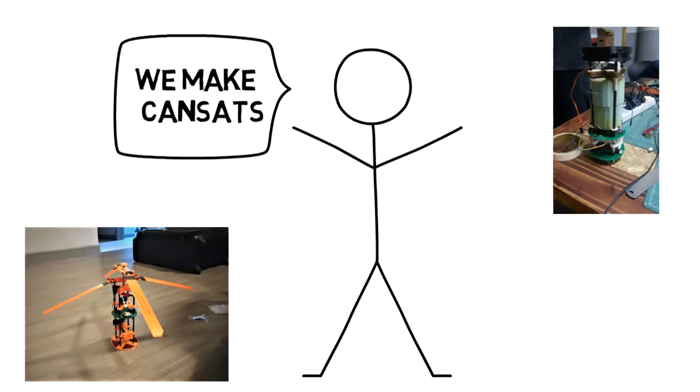Hello there. I know we are meeting for the first time. Actually, it is our first time here at the Spaceport America Cup. My friends and I, we are major aerospace enthusiasts and we make CANSATs, quite a lot of them. We thought, why not rockets as well? And then we discovered the Spaceport America Cup. We are very excited to be a part of it and looking forward to a good competition this year.

Hello, we are Team Samarth from VIT Vellore, India. I'm Pranchu Grawal, the Vice Captain and Aerodynamics Head of the team. We are competing in the 10,000 feet COTS Solid Rocket Propulsion System category with our launch vehicle Agastya. Its name is derived from the epic of Ramayana. The name of our payload is Pimac. Our team is divided into three major departments, namely Mechanical, Avionics, and Management. Mechanical department is further broken into three sub-departments, namely Aerodynamics, Structures, and Propulsion. Each department and sub-department have their own leads and members.

This is our maiden attempt at the competition and our team has worked incredibly hard despite the pandemic. Now, let's get started with the technical portion of the presentation.

Hello everyone, I'm Lakshman and I'm the head of propulsion at Team Samarth. Now let's look at the propulsion subsystem. What started as a bunch of people making rocket candy motors for fun without knowing how or why they worked the way they did has evolved into the department of propulsion. With little to no specialized resources due to the novelty of a student rocket team in the university, we had a challenging task at hand.

In this past year, we haven't just learned, we have also come up with our very own interpretations of better rocket propulsion systems. Since this is our first year at the tournament, we have opted for a COTS solid rocket motor to gain experience and come back in subsequent years with ever more interesting ideas.

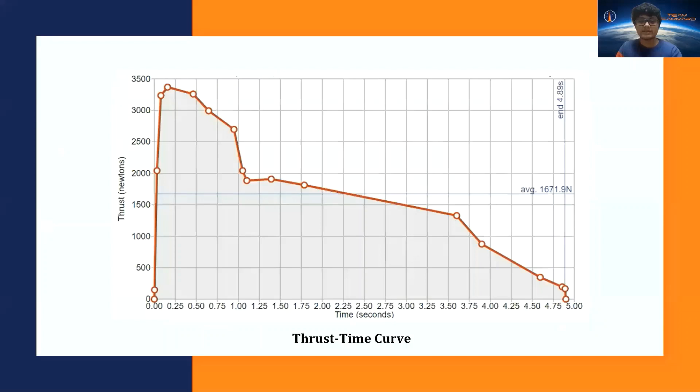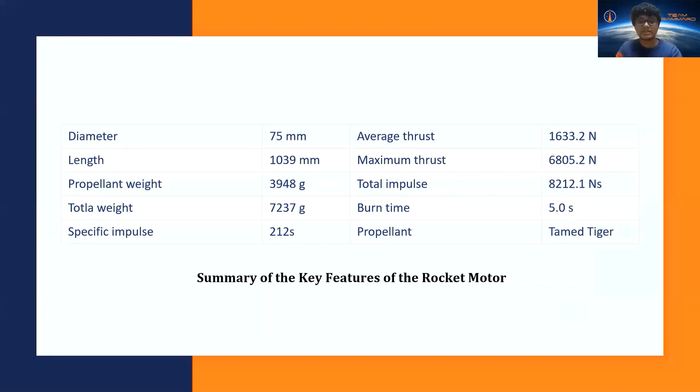The vehicle's propulsion system is an M-class P-type solid rocket motor manufactured by AMW. A high thrust motor is chosen to achieve a straight and stable flight with a target altitude of 10,000 feet. Furthermore, an initial thrust of about 3,000 newtons ensures a high launch rail exit velocity. The total impulse of the motor is about 8,200 newton seconds, which is found to be acceptable as per the guidelines.

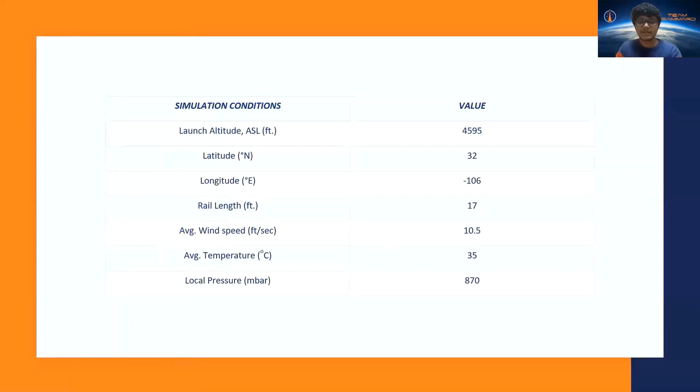The flight mechanics subsystems conducted flight path simulations of the rocket during different design stages, verifying that an apogee of 10,000 feet is achieved safely. Simulations were conducted using probable launch conditions obtained using historic weather data. Worst case scenarios were assumed wherever relevant.

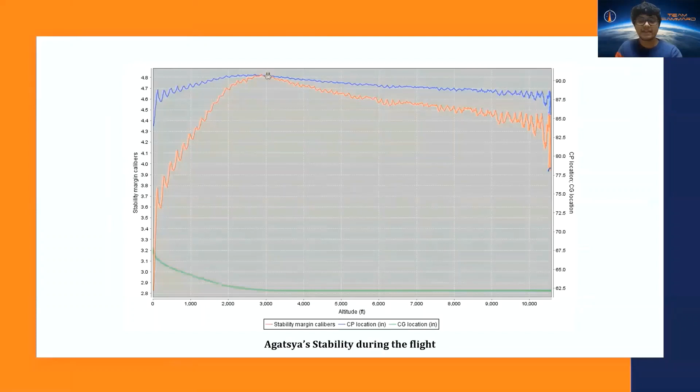The team used OpenRocket as the primary simulation software to precisely predict the flight profile and provide us with detailed flight data. Results show Agastya was able to attain an altitude of 10,000 feet successfully and also fulfill the competition's stability criteria for the flight.

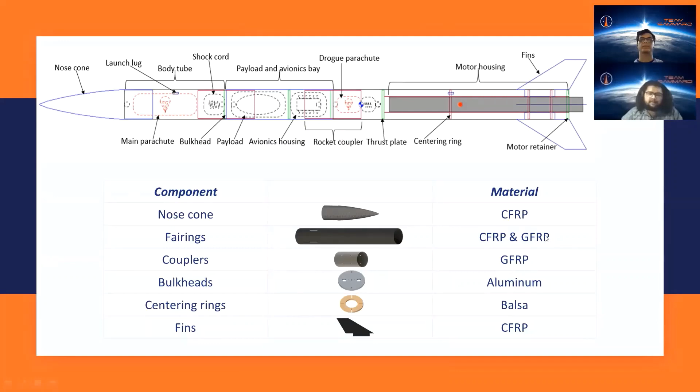Presenting Agastya's aerostructures, my name is Harsh Desai. And I'm Sankar Dua. We are from the mechanical department, and we'll be taking you across the design and manufacturing that went behind Agastya's aerostructures. This is Agastya's sectional view displaying the complex internal subsystems. The rocket is made up of carbon fiber, glass fiber, balsa, aluminium, as well as 3D printed material.

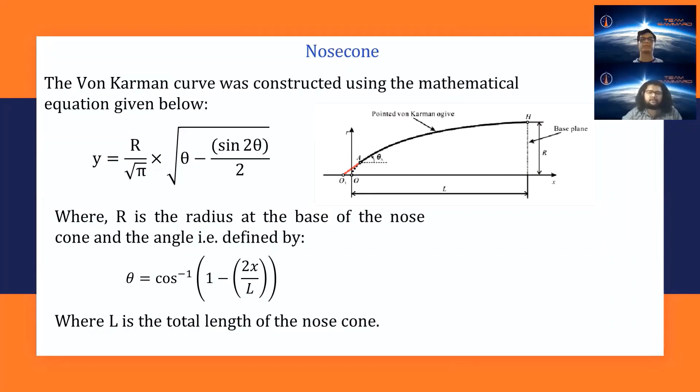Now coming on to the nose cone. The nose cone for Agastya was developed using a Von Karman profile with a fineness ratio of 3, as it provided the least drag characteristics and attained maximum apogee amongst other profiles. Different nose cone geometries were analyzed using OpenRocket and then further studied by conducting a CFD simulation on ANSYS Fluent.

Now, the manufacturing of the nose cone was done in carbon fiber fabric with epoxy as the matrix by wet layup process. Since we haven't had enough practical experience with composite manufacturing, we decided to go with the most suitable option we studied about in our college courses, which was wet layup. Filament winding was ruled out due to the unavailability of technology.

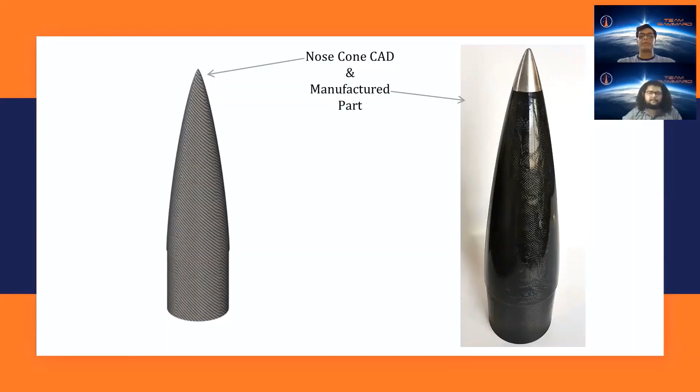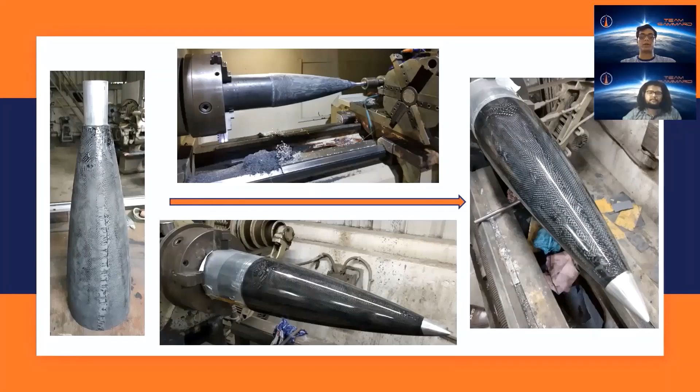Now, coming back to the wet layup method, we needed a mold that could act as a die for the layup process. So to avoid the costs involved in making the aluminium die, we used an ingenious 3D printed mold using ABS material. The first ABS mold was given a 5 mm thickness, but the curing process in wet layup is highly exothermic, and this caused the first ABS mold to deform. So we then printed a 10 mm thick mold so that the ABS material could withstand the thermal stresses involved and could give us the exact profile for the nose cone.

Now coming on to the body of the rocket, it is made up of 2 carbon fiber tubes and a glass fiber tube, all joined by couplers. The 3 sections of the rocket would be recovery, avionics, and propulsion from top to bottom.

The tube joining the nose cone is the upper fairing. This contains the main parachute of the rocket and was manufactured in carbon fiber.

The second tube consists of the avionics bay and payload. This section is responsible for the transmission of telemetry, and to facilitate that, the second tube was manufactured in glass fiber.

The last section, which is the motor bay, consists of the parachute, the motor of the rocket, and contains slots for the addition of fins. Being the longest body tube and consisting of the motor of the rocket, it has to be structurally sound to withstand the stresses involved, and hence it was manufactured in carbon fiber.

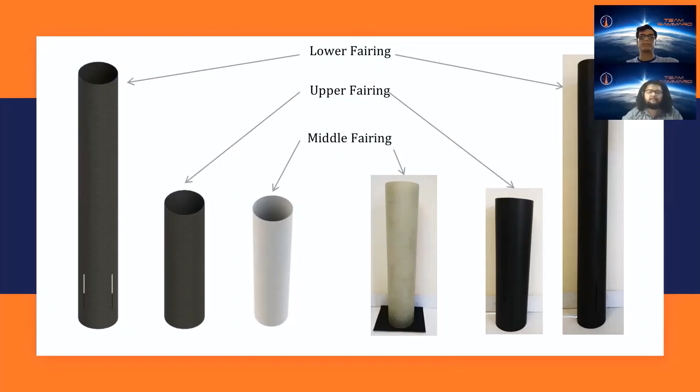Now, the couplers to join these tubes were made out of glass fiber, and the length was chosen to be double the radius of the fairing to avoid buckling. While manufacturing the couplers, we learned that the given tolerances weren't enough, and hence it had to be sanded down later.

All these components comprising the rocket body, namely the tubes and couplers, were manufactured on aluminium mandrels using wet layup due to its simplicity and cost effectiveness.

Now, to help transfer the major loads on the airframe, namely engine thrust and recovery deployment, Agatsya consists of bulkheads. Now, these bulkheads should have a high strength to weight ratio and mustn't be affected by these thermal stresses involved. The bulkheads used are 0.6 inches in thickness and made up of aluminium.

Threaded rods are connected through each of the bulkheads along with the avionics and payload to help with the structure to withstand the ejection load.

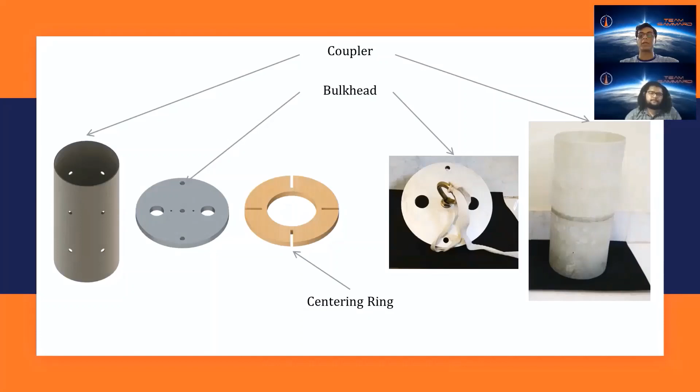Now, coming on to the fins, to determine the design of the fin module, emphasis was made on two primary design parameters: first, an efficient planform geometry, and second, a uniform cross-sectional profile. The fin design was optimized to provide stability throughout the flight, making the rocket reach maximum apogee.

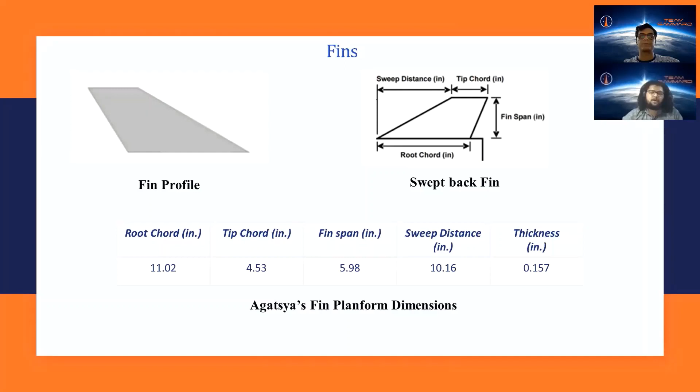The first step was to study different technical reports published by the winning teams to have a broader perspective towards choosing the best possible design. Open Rocket was used to analyze and compare different design configurations.

So the current rocket is equipped with 4 fins equally spaced around the airframe, which are mounted onto the lower fairing, along the motor tube and through slits in the airframe.

A high stiffness fin is required to withstand the flutter that takes place at the velocities in which the rocket would travel. Carbon fiber was hence considered appropriate as it gives high tensile modulus and is lightweight.

So the method of manufacturing was wet layup followed by high force compression. The carbon fiber fabric was first laid up using epoxy as a matrix in a 4 mm thick plate, which was then compressed to a force of 10 metric tons for 8 hours to help the resin cure.

This plate was cut using a water jet cutter into the desired profile of the fin. So now these water cut fins were inserted into the slits of the body tube onto the centering ring and then bonded with epoxy. We added 2 more wet layers of carbon fiber along the contact edges to maintain structural integrity.

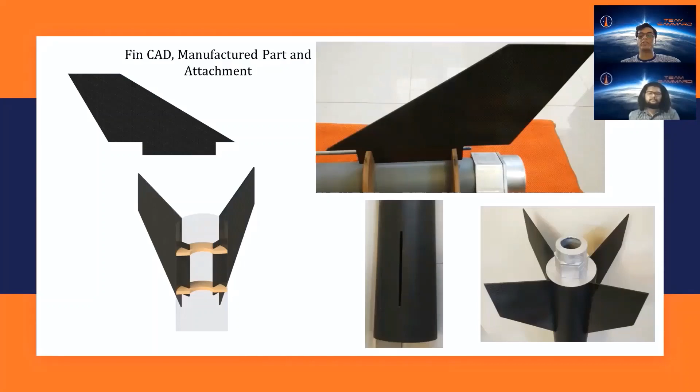So our payload is a pitch measurement and control unit, which we call PiMAC. A rocket is prone to disturbance and turbulence. The purpose of PiMAC is to measure the rocket's pitch using an inertial measurement unit as it ascends and make corrections to a custom gimbal that we've designed based on a predefined trajectory that we set.

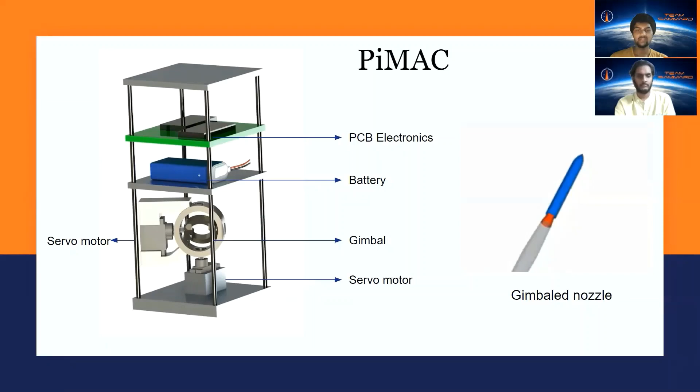The purpose of the gimbal is to demonstrate how the corrections would have been made if the rocket's nozzle would have been armed with this gimbal system. However, currently the gimbal is placed inside the payload structure and does not interfere with the actual rocket's flight.

The payload structure consists of an optimized dual-axis gimbal and the supporting electronics. The gimbal is controlled using 2 servo motors capable of 360-degree rotation, providing complete rotation across 2 axes. The supporting electronics includes a microcontroller, an IMU sensor, and a battery to power them up.

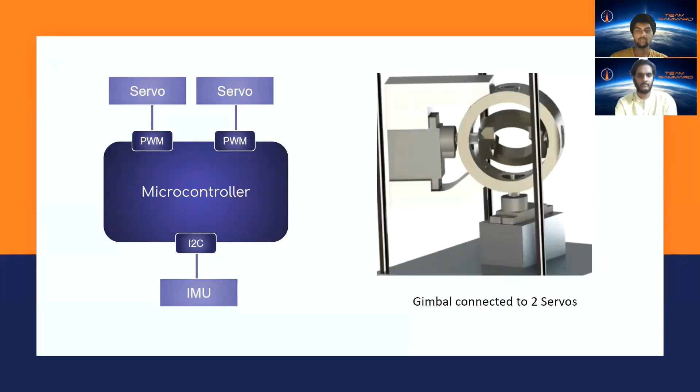The IMU sensor selected is BNO080, whose gyroscope provides pitch values of the rocket. A PID controller is designed which is being implemented using Raspberry Pi Pico. The block diagram in this slide shows the closed-loop control system that is being implemented.

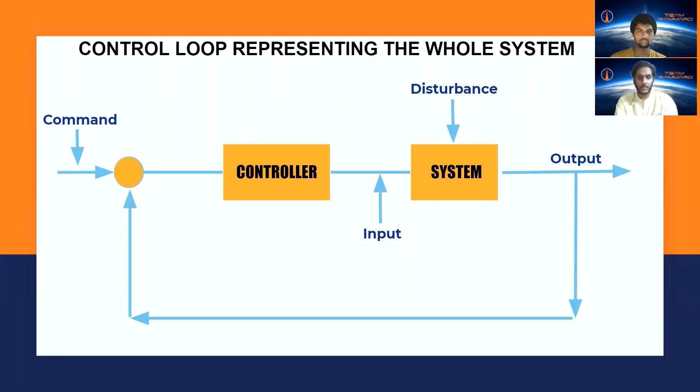The predefined pitch value is passed as command to the PID controller, which will control the actuators. The system's response to the controller output as measured from the IMU sensor is fed back to the controller, so that if any deviations are observed due to disturbances in flight, necessary corrections are then made.

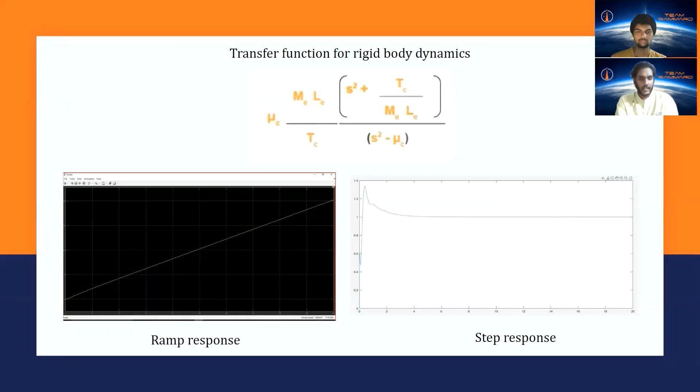The PID algorithm has been designed considering the rigid body dynamics of the rocket according to the transfer function given in the slide. A time slice approach has been used where the short period dynamics of the rocket is considered. The PID gain parameters were tuned based on step and ramp response of the system, and various simulation outputs were analyzed to get a stable system.

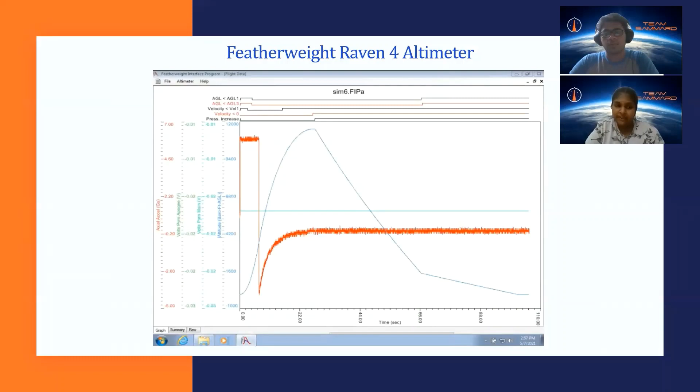The secondary system is programmed to deploy the drogue after a set delay of a few seconds after reaching apogee, and the main parachute after a set delay of a few seconds after reaching 1,500 feet.

A CO2-based ejection mechanism is used as a release mechanism for the parachute at the programmed altitudes. Both the primary and secondary altimeters control two igniters each through the pyro channels. Two 9-volt batteries are used to power up these altimeters.

The altimeters also serve the purpose of the altitude logger, which will measure the rocket altitude through barometric pressure and atmospheric temperature data and store it. The flight data can later be plotted and analyzed on the GUI.

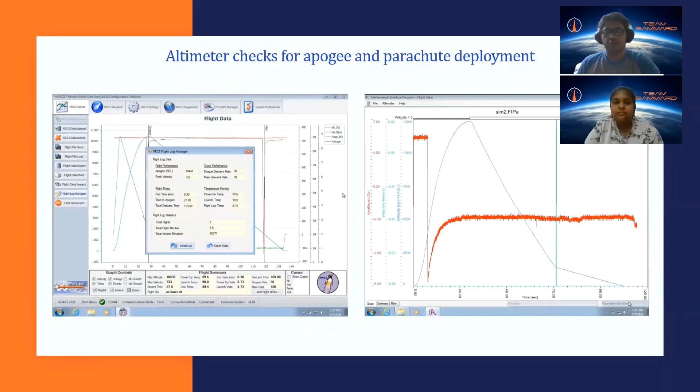The second recovery system consists of the Featherweight GPS tracker system, which is used to acquire the location of the rocket in terms of latitude, longitude, and altitude above the ground.

The ground station endpoint is handled by the user and is responsible for relaying the data to a mobile app. This will let us track the position of the rocket once it lands and retrieve it. A 3.7-volt lithium-ion battery is used to power up the GPS.

Now on to the drift distance estimation. For determining the drift distance, OpenRocket was used to simulate the worst-case scenario at the launch site, when the average wind speed could go up to 7.2 miles per hour with a turbulence intensity of about 10%.

The results showed that Agastya will have a maximum possible lateral distance of approximately 2,860 feet east of the launch, but only lands 1,296 feet from the launch site. This distance is well within the regular operational range of the launch control system, thus aiding a successful recovery of the rocket.

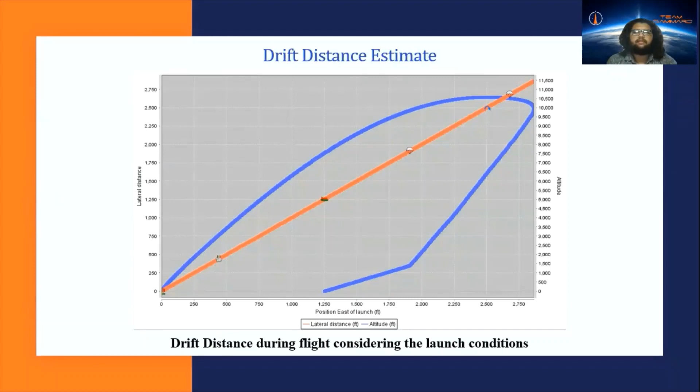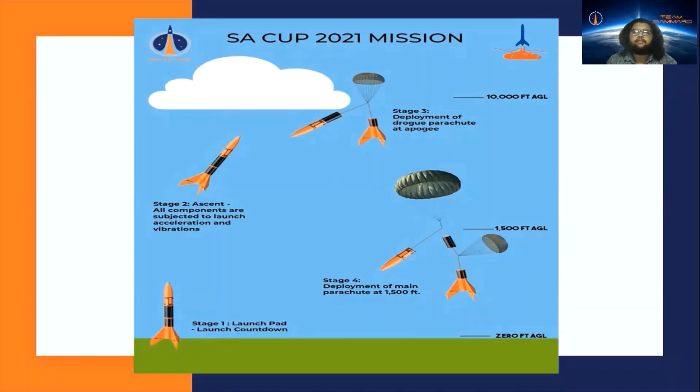Agastya employs a typical dual deployment recovery system. It will carry two parachutes, drogue and main. The drogue parachute will be deployed at apogee to initially reduce the rocket's descent velocity so as to accommodate the deployment of the main parachute at an altitude of around 1,500 feet.

Now on to the designing of the parachutes. Both parachutes are elliptical in shape that produces a coefficient of drag equivalent to 1.5. The drogue and main parachutes are planned to be segmented into 8 and 12 gores respectively, which would then be integrated together to form the canopy of the parachutes.

Our team's prior experience in designing parachutes at other intercollegiate design competitions helped us accommodate an accurate methodology to develop the parachutes. Both drogue and main parachutes have been designed with vent holes to ensure the stability of the rocket during recovery.

The attachment point of the shock cord for the drogue parachute would be to the bulkhead of the avionics bay, while for the main parachute it will be attached to the bulkhead at the nose cone. The mechanical attachment points for both parachutes would consist of an eye bolt for attachment to the bulkhead and a swivel link where they would be tied to avoid collapse of the canopy.

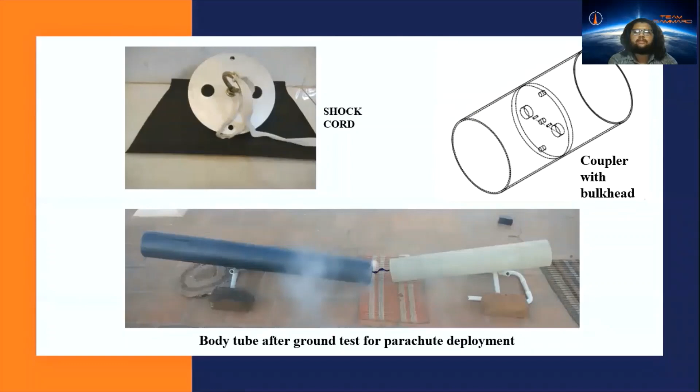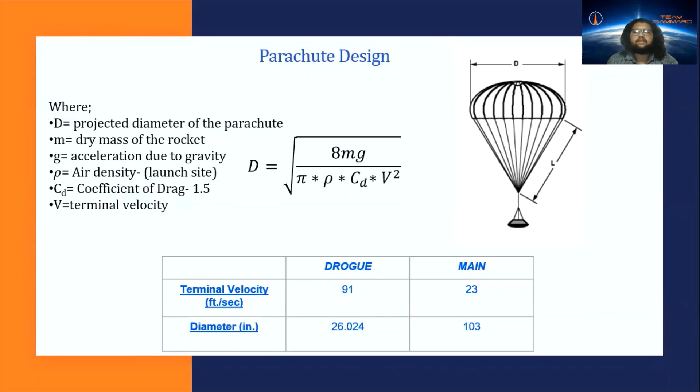The parachutes were designed considering they reach a quasi-steady state with the desired terminal velocities attained. The drogue parachute is 26.024 inches in projected diameter, which reduces the initial descent rate to 91 feet per second. The main parachute is 103 inches in projected diameter, which further reduces the descent rate to 23 feet per second.